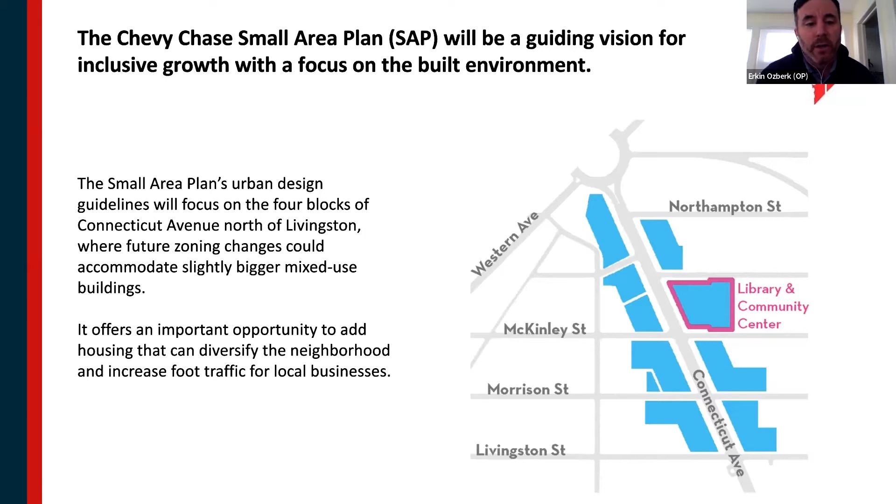Thanks. I wanted to give you a little background on the small area plan. I know many folks participating today have joined us on many of our past engagements and activities. For those new to this process, the small area plan will be a guiding vision for inclusive growth, with a focus on the built environment along the Connecticut Avenue corridor in Chevy Chase, focusing on the blocks from Livingston Street north to Chevy Chase Circle. That's really what we're focusing on today - urban design, buildings, and the street experience of how this neighborhood works today and how it could work in the future with changes to accommodate bigger buildings and more housing.

As the small area plan is one of many projects we're working on, I think it's helpful to contextualize this for folks. We often get questions like, why are we working in Chevy Chase? What's happening in Friendship Heights? What about down in Cleveland Park? Our office is actively engaged across Ward 3 and across the city doing planning.

Our efforts and focus, particularly in the area we call Rock Creek West, which is Ward 3, have been on achieving our ambitious housing goals, particularly affordable housing goals, for this part of the city where we haven't seen much affordable housing built in recent decades, despite the city's growth. I wanted to flag this document, released in December, called the Rock Creek West Roadmap. It was released in Chevy Chase to a large group outside the community center and library, where the mayor spoke about opportunities to help meet these goals in this part of the city.

These goals are not just about planning - they're related to housing finance, the private sector, and community groups, and how we all need to work together to reach greater housing equity in the district. That meeting was held outside the community center and library because that is an important site in this planning process, where we'll be looking at contributions to housing and affordable housing in the Chevy Chase community.

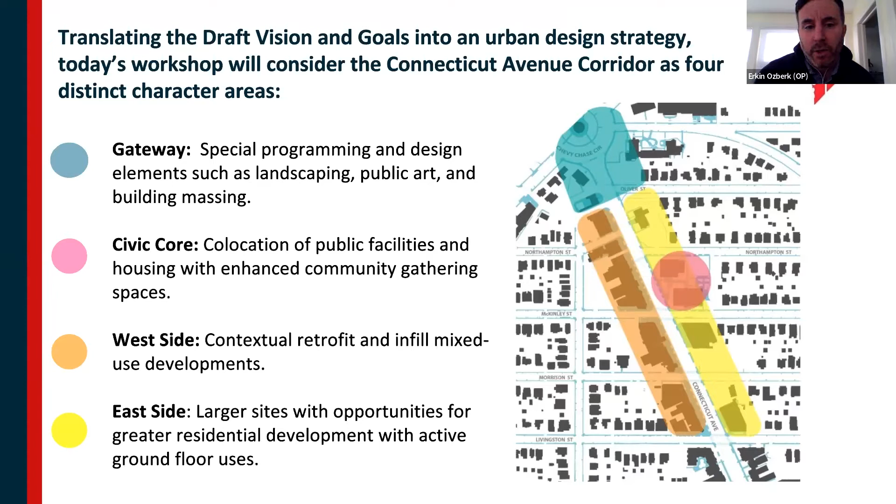As we're talking about buildings and future development, we get this question a lot, so we always want to make sure we're covering it in our material: being clear on the size and scale of some of those buildings might be in the future.

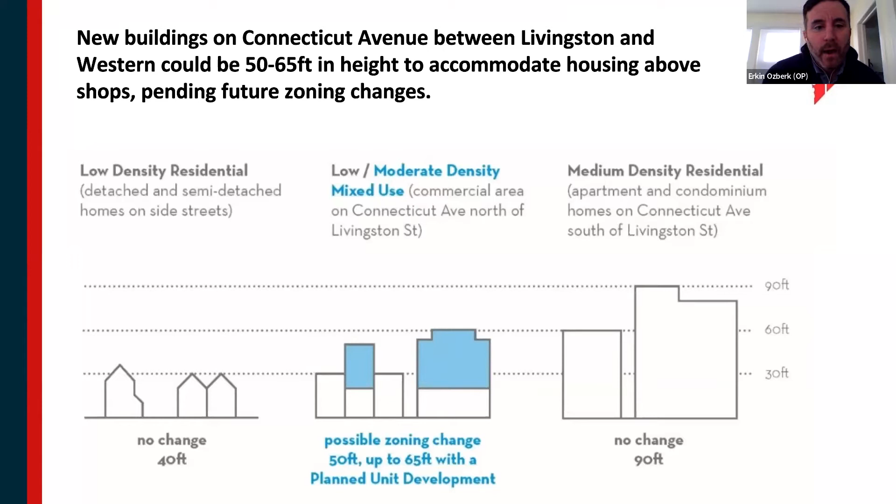With that, I'm going to hand it off to Lee Quill from Cunningham Quill to talk a little bit about going from the 2-dimensional to the 3-dimensional and visualizing what that change might look like in specific places along the corridor.

Great, thank you, Erkin. Good morning, everyone. My name again is Lee Quill from Cunningham Quill Architects. Joining me today from our group is Nandor Mitrasak, Adam Chamey, and David Otieno, and they'll be speaking in just a moment. We're sorry we can't be with you in person this morning. We're looking forward to seeing a lot of you again. We did have that opening in some of the tours when we were on the tour in November to be with you, but this is good. We have a wonderful turnout today, so thank you.

After months of discussions with OP, and participating in the tours, the teams got together, OP and our group, to decide how best to visualize some of the potential redevelopment opportunities that may happen in this particular corridor. Rather than select every site that may or potentially could redevelop or be asked to be developed, we selected a few sites to take a look at, to share with you visually how they might go in redevelopment.

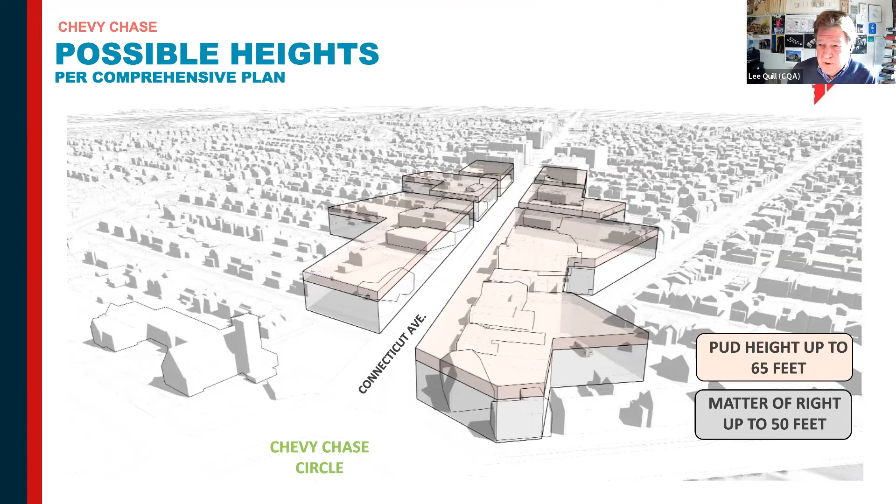So I'd like to turn it over to David now to take you through the first group of sites, being the gateway opportunity sites coming off the circle. David?

Yes, so these sites are established as the gateway in the vision plan. As you're coming from Maryland, this is the first threshold for the neighborhood that establishes Chevy Chase as a neighborhood. We were thinking these sites are really strategic for creating that sense of what Chevy Chase is, with some landmark buildings establishing that character around the circle as you're entering from Maryland.

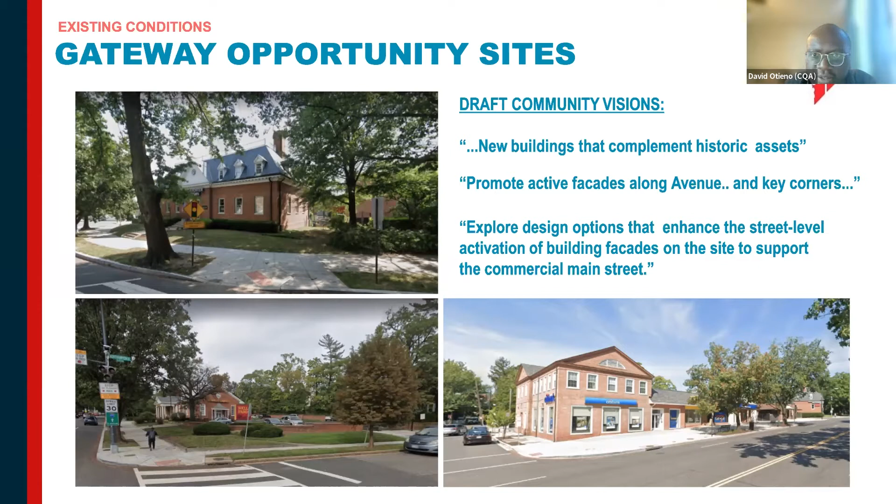So, could you have the next slide? This is the view coming in from Maryland at the DC line. Chevy Chase Circle is to the bottom right of the site, and we're looking at the Long and Foster building on the circle. That could be a signature building that establishes the character and frames that opening, along with the existing church tower.

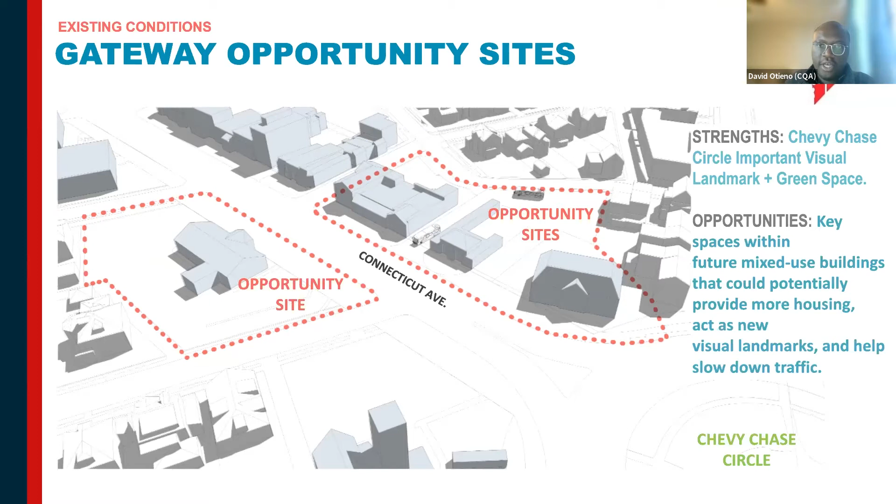So this is illustrating, at the by-right 50-foot height, a mixed use development with ground floor retail along Connecticut Avenue, showing those architectural elements that could occur flanking Chevy Chase Circle. On the left, the building on the Wells Fargo site also participates in that gateway experience, with another architectural element on the corner. We're also looking at feathering the density down as you move to the residential single family neighborhood, trying to be respectful of the height as you move off of Connecticut and feather down into the neighborhood.

This is showing the 65-foot potential height limit that would be under the PUD process. And of course, that would go through community engagement, and the community would have some say in how that would develop. Also getting your feedback, similar to the other plan, we're showing penthouses because those would be able to go above the 65 height limit.

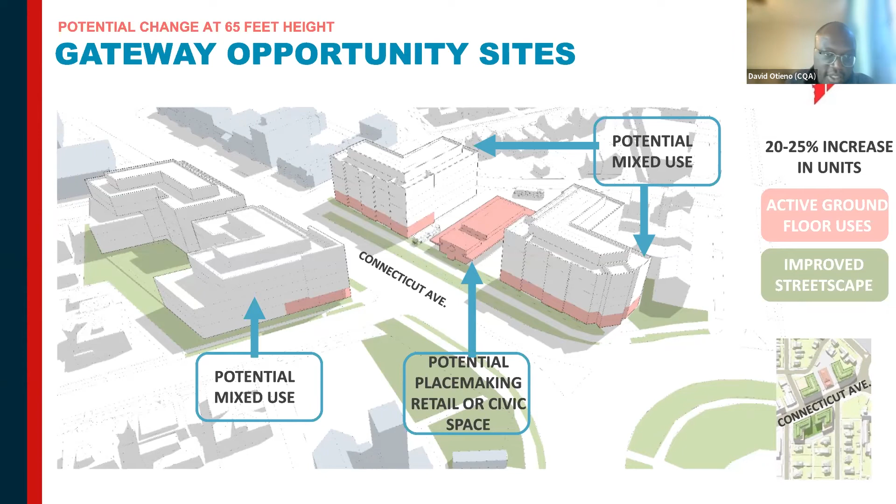I'm sorry. I'm going to pass it off to Adam, my colleague.

Hi, everyone. My name is Adam Chamey from Cunningham Quill Architects, and I'm going to talk to you a little bit about that kind of western side of the Chevy Chase corridor.

In your draft visioning statements, you really express the idea that these buildings are really the heart of the community right now. And as this area develops, and as new buildings or new complementary uses come in, they need to reflect those historic assets and that character of the neighborhood.

That's really critical on this western part of the strip, where there are very limited opportunities for large scale developments or changes over time. That fine grained mix will in all likelihood stay for the next 20, 30, 40, 50 years. But there are a few sites, a few opportunity areas where maybe there can be new thoughtful mixed use, new opportunities for housing or retail along the corridor.

Specifically, you see on the screen, we decided to hone in on one specific site behind the PNC Bank. It's currently a parking lot, along the corridor, a relatively empty, underused stretch between the great residential neighborhoods and the corridor. So a great opportunity site for very sensitive, complementary new buildings coming in, and we could envision that over time.

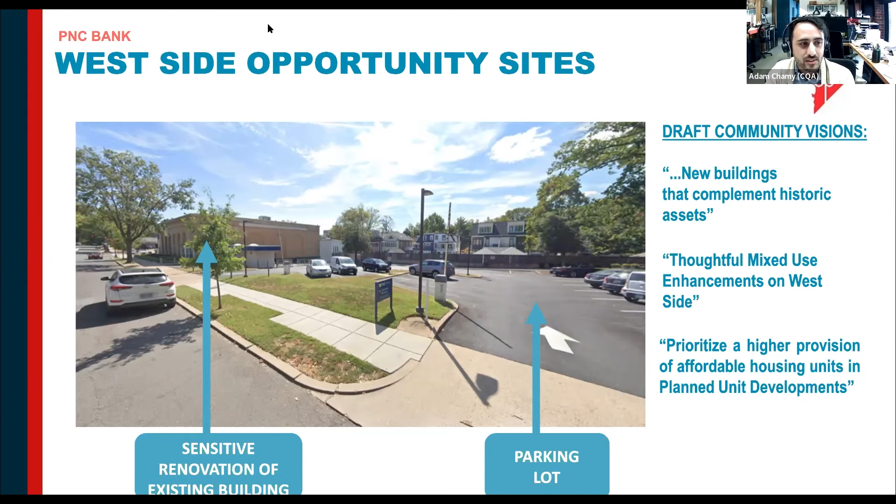So this is an overall view of that western stretch, and you can see that parking lot to the rear of the PNC building, and then you can see the single family homes, usually about 3 to 4 stories above.

And this is another view of that opportunity site that we're highlighting. Just as an example, there's other parking lots and other areas behind the western corridor that are similar.

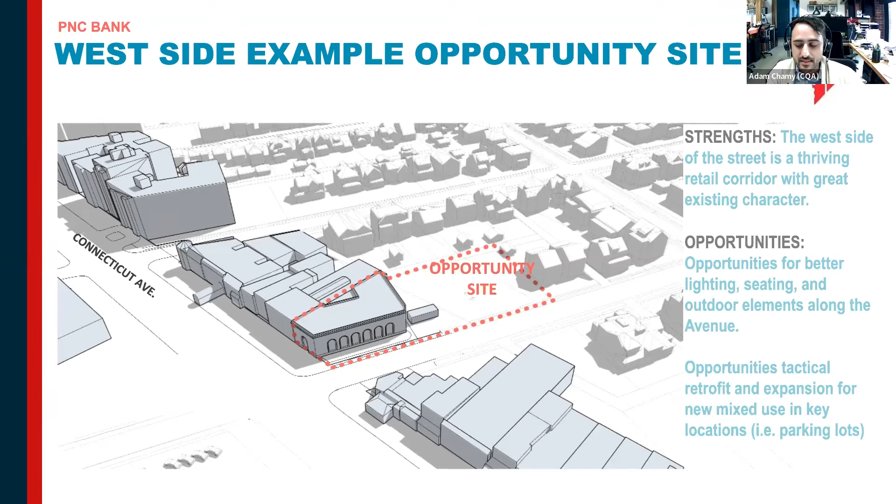When we were honing in on this specific site along this corridor, the west side of the street, as I said before, is your character, is your thriving retail corridor now. But one of the great opportunities is for tactical retrofit of these buildings to help retail thrive and grow over time. And then as these new opportunity sites come in, with the adaptive reuse of these historic and existing buildings, you have better opportunities for better lighting, seating, outdoor elements as new retail and new uses come in.

So similar to what David shared, this is an example of that 50 feet by right development. Imagine the PNC owner comes in and wants to do something with that parking lot. This is, from our perspective, what they may propose.

It could be any number of changes, but one of the ideas is that with some sort of change in use, you maybe could reactivate that storefront and maybe activate even the roof, depending on what type of ground floor uses are used. Maybe it's a restaurant, maybe it stays a bank, maybe it becomes a better retail use, but something to celebrate these great buildings along the retail stretch.

We also looked at the parking lot's transformation into a larger, perhaps residential, perhaps mixed use building that would fit within this currently vacant site, but then really respectfully step down to be at the same height as the single family homes adjacent, with a strong green buffer to complement the green leafy residential neighborhoods adjacent.

Here's an example of what that might look like at a 65 feet height. This would be through a PUD process, through neighborhood engagement, through work with the community. But you could imagine, flipping between these two, a kind of smaller, additional floor added.

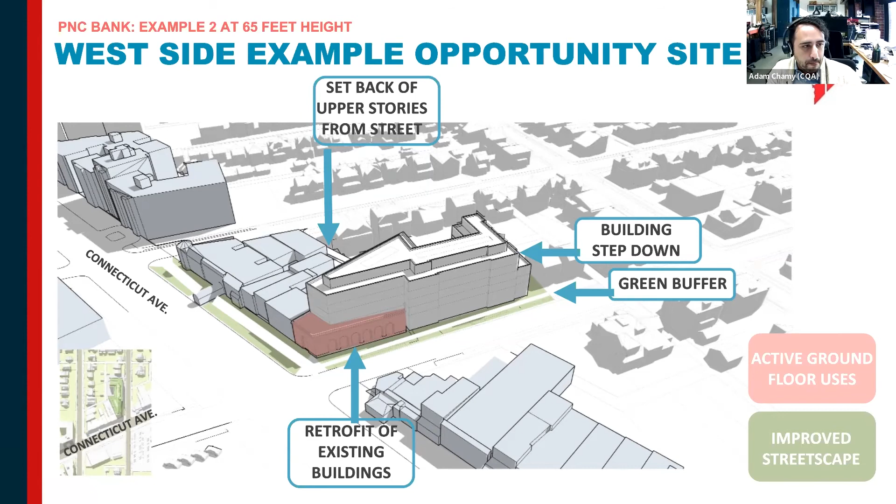The second kind of opportunity area, as Erica spoke about before, is the east side. Unlike the west side, where there's really limited opportunity for larger change, it's a lot more about protecting and retaining existing assets to the community. On the east side, you have a lot more larger parcels, which you could imagine are much more feasible for somebody to be interested in redeveloping over time.

This was also part of the community vision. Your draft community vision spoke about more residential development and increased commerce on the east side to reflect this awesome character you already have. You also talked about exploring design options that can bring street-level activation of these building facades to support the commercial main street.

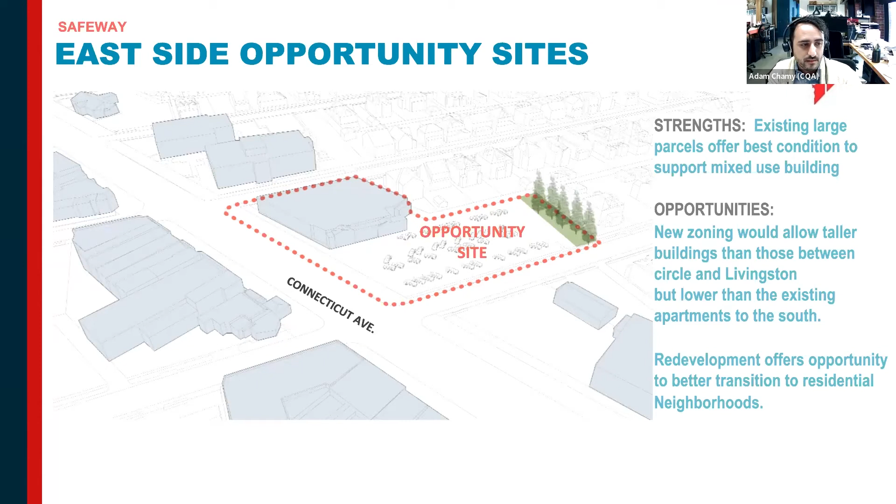This is another view of that site in a more diagrammatic way, showing the strengths of the parcel. It's a large parcel, in the best condition to support mixed-use buildings, unlike on the western side where that's a lot more difficult. You also have, with this new zoning, opportunities to allow taller buildings to complement the apartments to the south and bring in more residents who can shop at these businesses, as well as support your equity goals of finding more affordable housing.

So once again, this is that example we showed before of a by-right 50-feet-high development. This could be what it looks like: maybe a modernized grocery store at the ground floor, and as part of that redevelopment, you get a better streetscape that can really be activated. Parking would most likely be underground, as is the case in most grocery stores and other parts of the city that have been redeveloped.

We imagine—you have a great green buffer of trees right now, but you could enhance that to make it a better neighbor to the surrounding neighborhood. And like the western side, we were really interested in creating building step-downs to the neighbors, to ease into and feather into that residential usage. I think that's something as urban designers, and I think you as a community, would be interested in.

This is an example of that planned unit development, 65 feet in height. Maybe you come in with community benefits to say, hey, we're really interested in equity, maybe we're interested in a specific streetscape enhancement. So you add, with the 65-foot height, basically one more floor to the building.

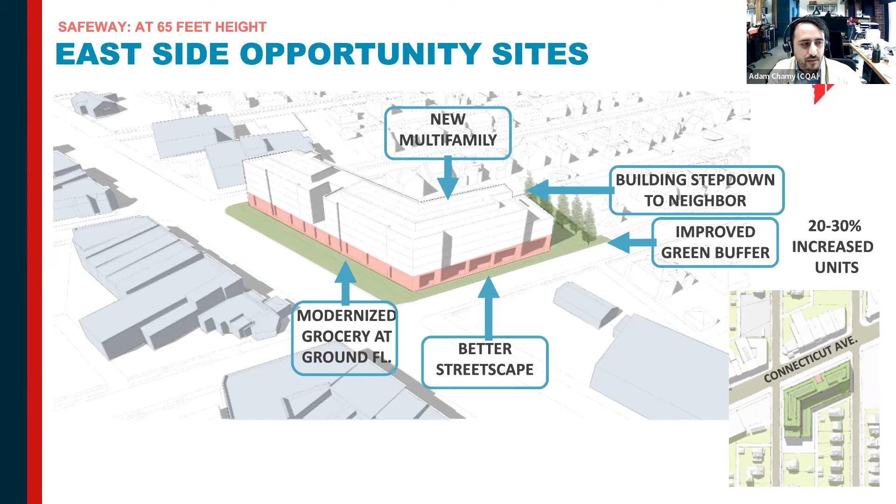Once again, as urban designers, we were still interested in keeping that green buffer and keeping a step-down to the neighbors where the height may be adjacent to those single-family homes, similar in this diagram. And this slide kind of speaks to that character.

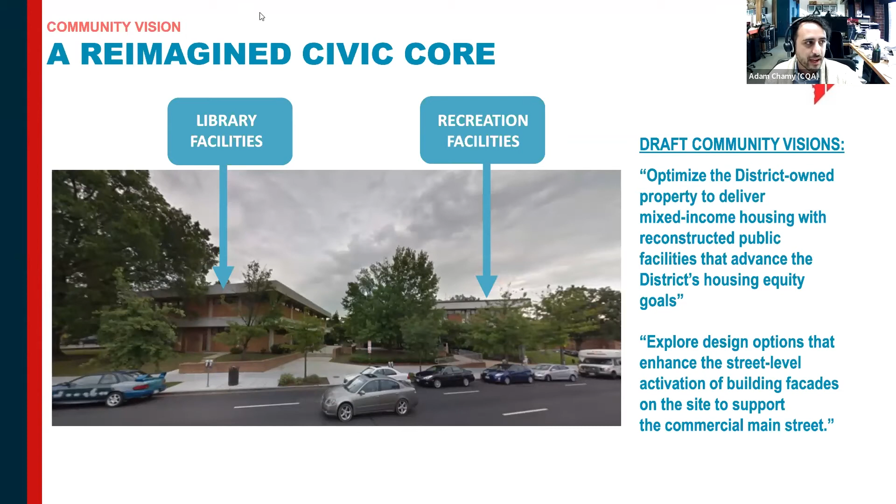I'm going to pass this off to Nandor, who's going to discuss the civic core and the reimagining of those spaces. Thank you, Adam. Pleasure to meet with you all today. My name is Nandor Mitrocsak. I'm an architect and urban designer with Cunningham Quill.

So we took a deep dive into the draft community visions for the civic core, and this site includes the current library and the community center, along with the basketball court, the playground, and the parking at the rear of the site. I've really looked at and reviewed the diversity of opinions on the use of the site today and how it could change in the future. I think the DC team has expressed this is a future redevelopment site, updated public facilities, and it really represents a great opportunity for the community.

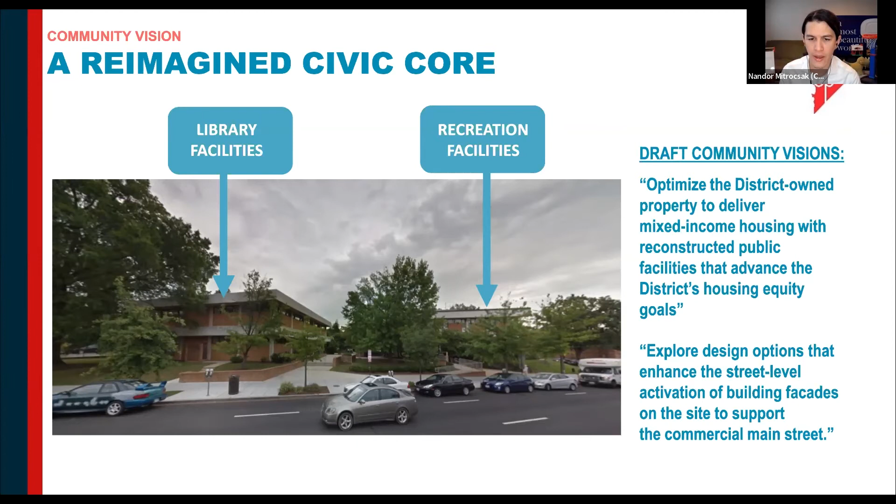Next slide. When we look at the site today, it's almost 2 acres. It's really in the center of the community. It has public uses and is well attended from what we saw during the site walks.

When we walked around with the community, we were taking notes about the character of these buildings and how they're used today. We observed a lot of use of the playground with the kids, and a lot of kids biking past the site, either in the street or on the sidewalks. The buildings are set back and don't really engage the street currently with design. You can see all the entrances to the buildings are internal to the site.

We did hear some observations from the community that this block feels a little bit dead compared to across the street, especially with the setbacks and the inward-facing nature of the site. So as this site redevelops and the city looks for input from the community, we're going to listen to you all today about how we can reimagine these buildings and functions. We're interested in the engagement with Connecticut Avenue, Northampton Street, and McKinley Street, and how we can reimagine these elements. Next slide.

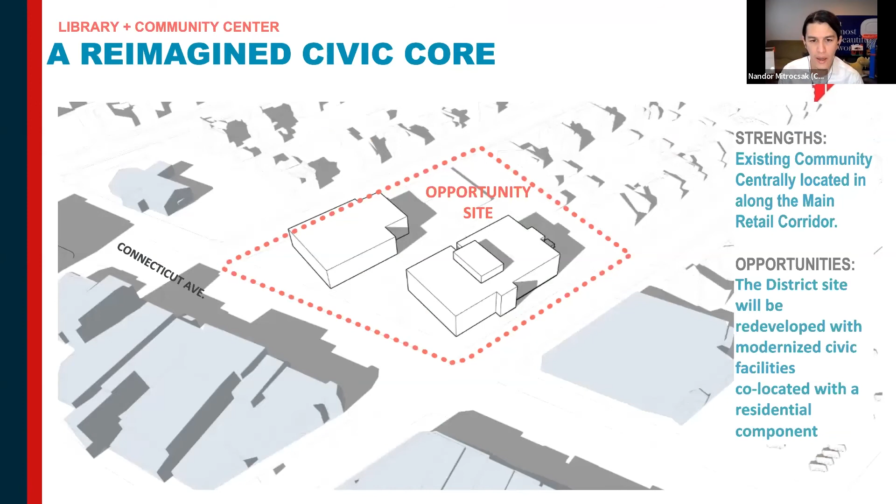So one option, and this is the first simple option we thought of, is maybe we co-locate the library and the community center together into a civic building that fronts Connecticut Avenue. It's a public facility, it captures the corners of both major streets, and maybe we embellish it with architecture so it has a strong presence on the corner.

And then we have an opportunity in between, as we go from these public-facing uses to the residential single-family neighborhood, for housing. I think we know the background market and history of Chevy Chase, and there really hasn't been new housing in this corridor in decades. This is a great opportunity.

This is a city-owned site. There's a lot of public input and a lot of opportunity for the community to weigh in on this site. So this presents a perfect opportunity to add affordable housing or mixed income housing. Maybe there's a need for senior housing within the community. These are all options that we're looking forward to hearing from you all about.

This particular design looks at a central courtyard. Maybe this is where some of these recreational facilities, the playground, or community outdoor space could be located. And then we have this new housing stepping down in density, with horizontal and vertical step-backs as we get closer to the neighborhood.

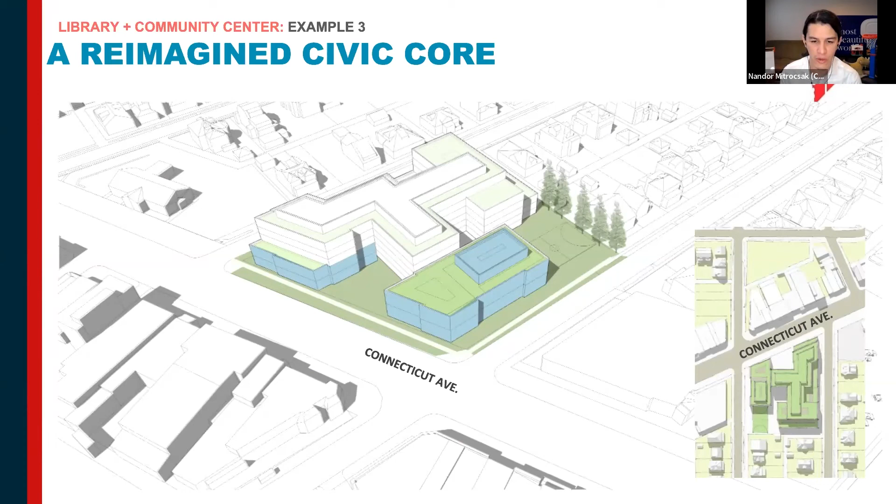And then we have this housing tapering down towards the neighborhood. We have maybe this recreational space in between, a pocket park or some landscaped area. But in any case, this is just another take on how this civic core block could be reimagined. Again, these aren't final designs. We're just showing multiple options to get your input, thinking about streetscape, corners, massing, and how these program elements may shift and move across the site.

We're really excited about the site. This represents a fantastic opportunity for the community to achieve a lot of the goals that we've heard in the community visioning, and we look forward to hearing from you all on that.

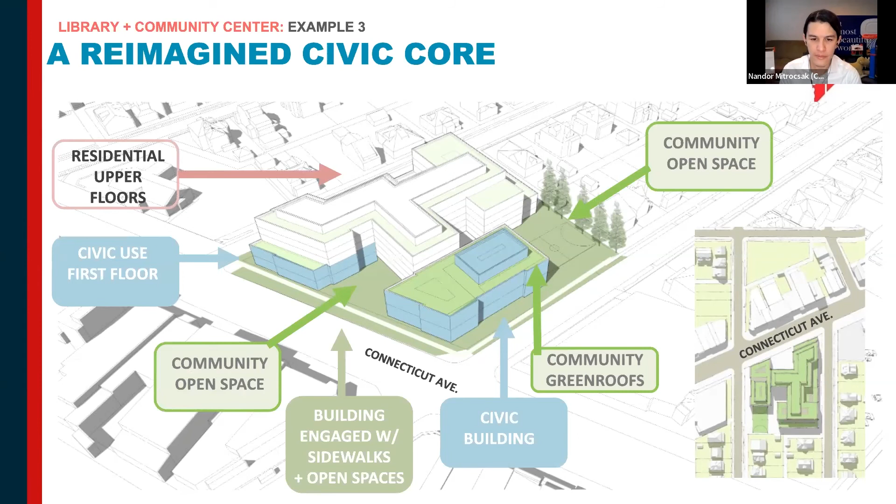So zooming back out to the corridor, I just want to remind everyone that this is thinking about the future. This is not going to happen next year, or in 5 years, or even 10 years. This is thinking far into the future on a 20 to 30-year time frame, thinking about how this corridor is going to evolve. Again, it's a very important part of the city, the city owns significant investments here, and there are a lot of great opportunities, as we've seen today. This will be incremental—it'll change over time, year by year and decade by decade, and we want to stay mindful of the bigger vision here.

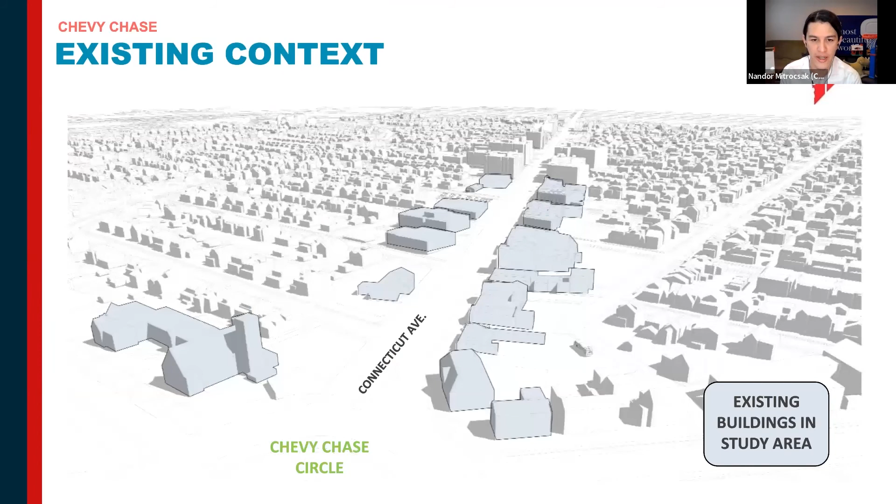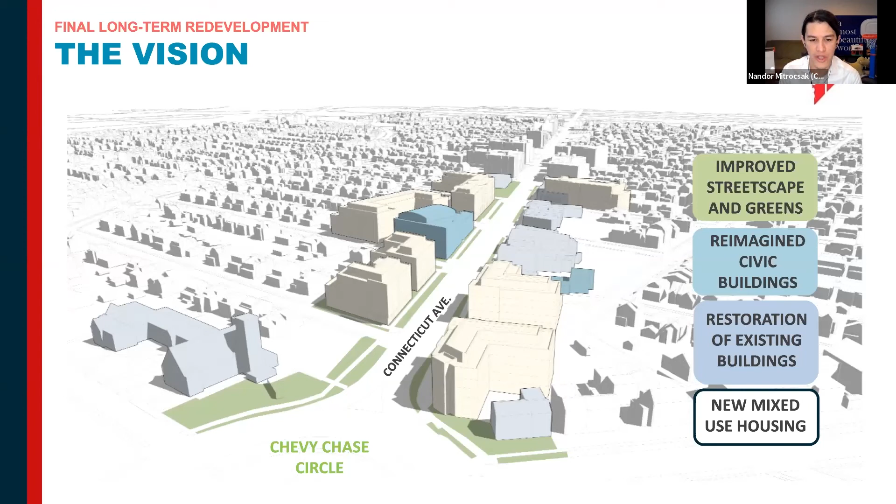Next slide. So this is what it is today. If we took a collection of everything we showed you today and built out this corridor—next slide—you can see how this may change over time. Connecticut Avenue will have this kind of gateway, as David talked about. The civic core will change and evolve over time, and maybe some of these historic properties may infill and develop, and the Safeway site certainly is a good opportunity as well. So over this time frame, we'd like to get your input on how Chevy Chase and this community core is going to evolve.

Okay, I'm going to hand this over back to Jamal and Erkin to talk about the breakout rooms.

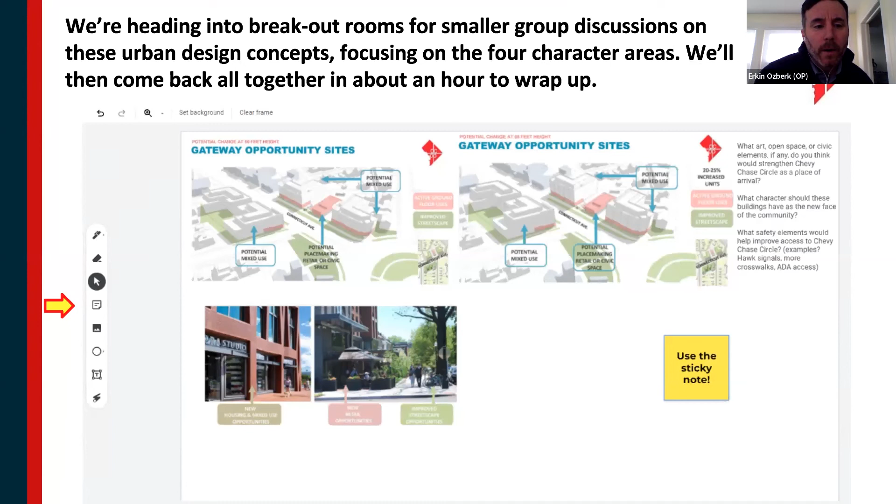If you go to the next slide, I think Jamal's going to walk us through some of the guidelines for our breakout rooms. Yeah, thank you, Erkin. Again, we want to promote civil and respectful dialogue in these breakout conversations. Here's just some of the guidelines that we want to share with you all as we're going into these conversations and deeper dialogues and discussions.

Folks will get the opportunity to have more speaking time in these smaller breakout rooms with smaller groups of participants. So breakout rule number one: enter with curiosity and ask clarifying questions. We're not expecting everyone here to be experts on this work. We want folks to be residents. Come here with questions and ask if you don't understand something that's being presented.

It's okay to disagree respectfully and openly without being disagreeable. That means don't point out or shame a fellow resident for a particular comment or feedback. Respectfully have an open dialogue around the particular feedback, and feel free to share some of your feedback as well to the Jamboards and to the conversation.

Stay mentally and physically present. I know this is a lot to digest and a lot of information was just shared, and that's a lot to process. What we're asking folks to do is bear with us through the breakout rooms and walk through the process slowly, and stay present in a way where you can contribute effective and efficient feedback in a way that's conducive to the space.